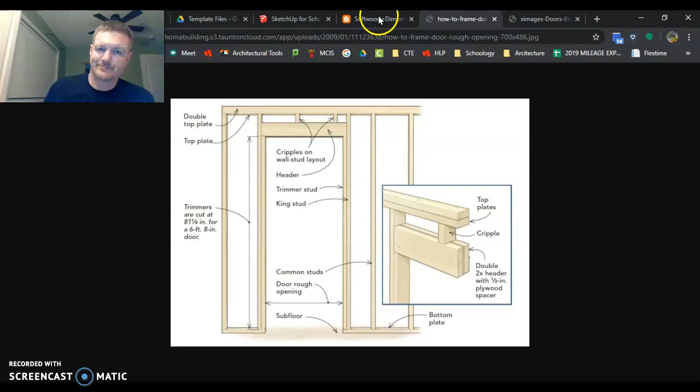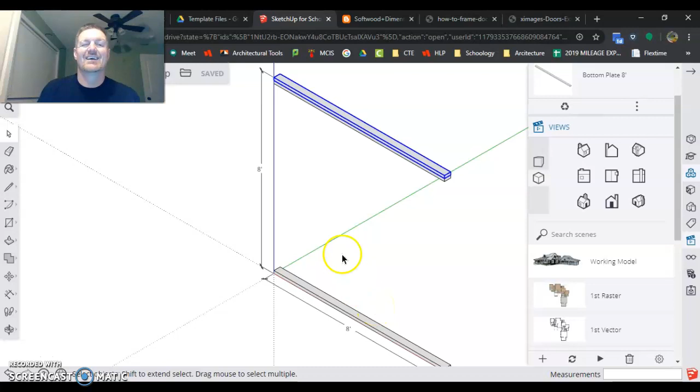So if we go to SketchUp for Schools here, and go to a little bit of a 3D view, you can see that double top plate. Now remember how the first one I had to make a component? These next two I didn't have to make a component because I just made them copies. The following here, we're going to make a stud, and then we're going to have to make a component for that.

So I'm going to click on my rectangle tool, because I need to go 1.5 by 3.5. And if I take a look at that, I already see 3.5 in there. So I'm going to go 3.5, comma, 1.5, and enter.

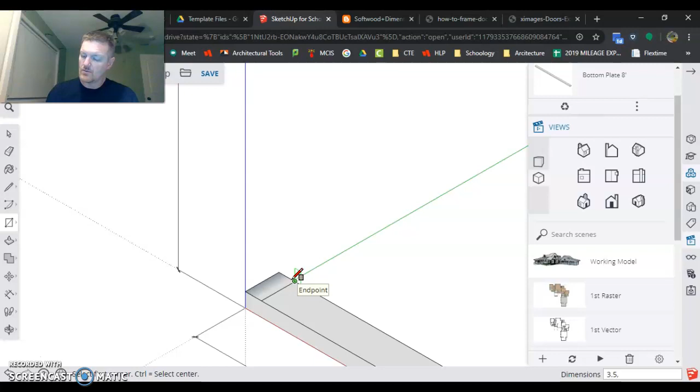Now this is kind of the cool part here. I'm going to use the push-pull tool. Click on this surface. It's kind of doing a little bit of surface fighting, but I can get it to go.

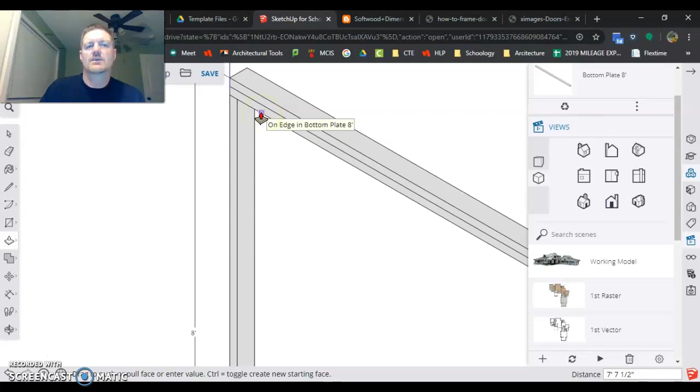And I'm going to just touch it to the bottom of here. And if you actually look down there, touch it at the bottom of the edge plate. It's 7 foot 7.5 inches. So you can type 7 foot 7.5, or you can just do that touch that I just did.

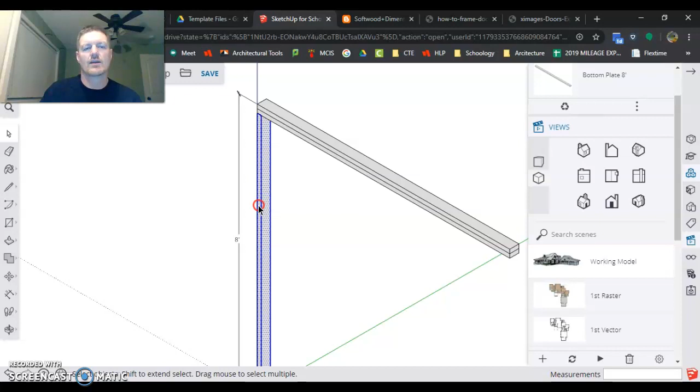Now I notice I can click on all these separate little parts and pieces. I want to triple click again, right click on it, and hit make component and call it stud. You don't have to put Mr. Han in there, I know I am already. So 7 foot 7 and a half inches and hit OK. I know that joke is good every year at this time.

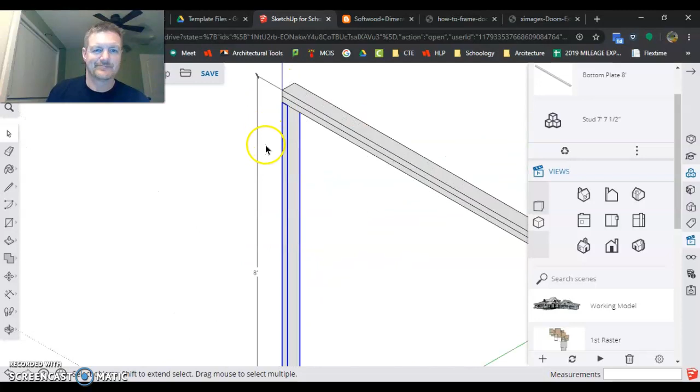And I have my first stud in place. Okay? Now just like before,

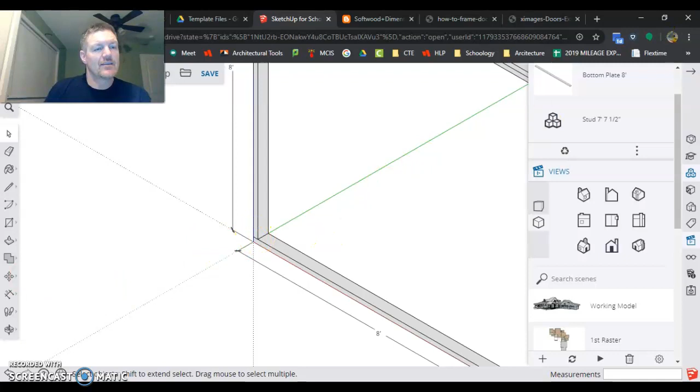we do a little bit of work here to figure this stuff out. Studs are spaced every 16 inches on center, except for that first one. And this is why. We're going to put a sheet of plywood on here.

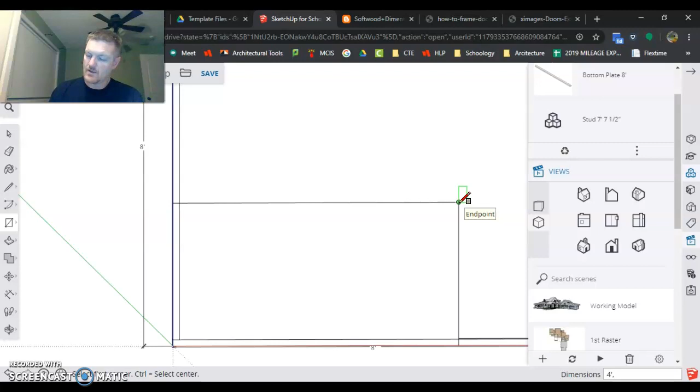And this sheet of plywood is going to be 4 feet by 8 feet. Enter. And that sheet of plywood covers up there. It goes all the way up. So you can kind of see that sheet of plywood sitting on there.

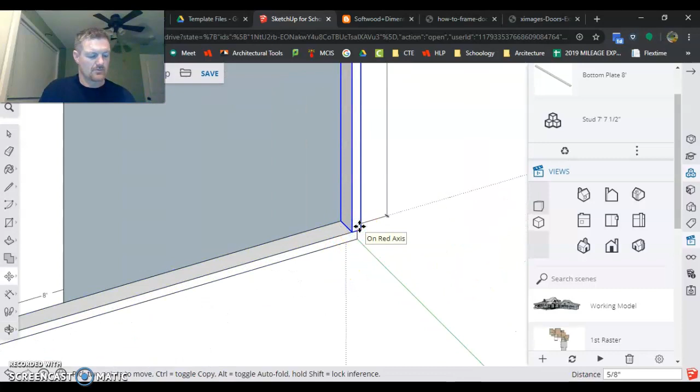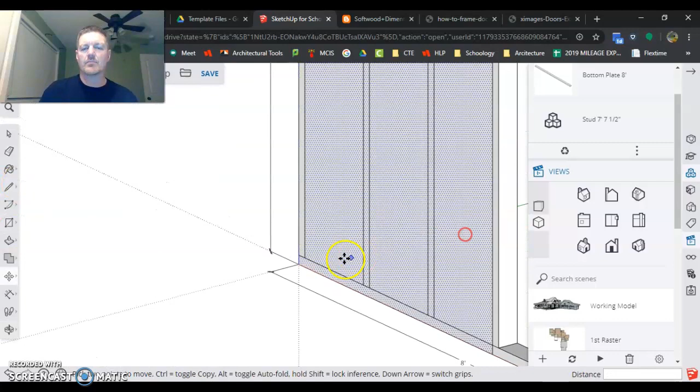If I do 16 inches on center, so I do this move that we did before, and I go Control, move it right down this edge and go 16, because 16 inches on center would make that 16 inches on edge as well. 16, Control, 16. We end up with that sheet of plywood not landing on the center of this stud. So when we go try to nail it on, it doesn't work.

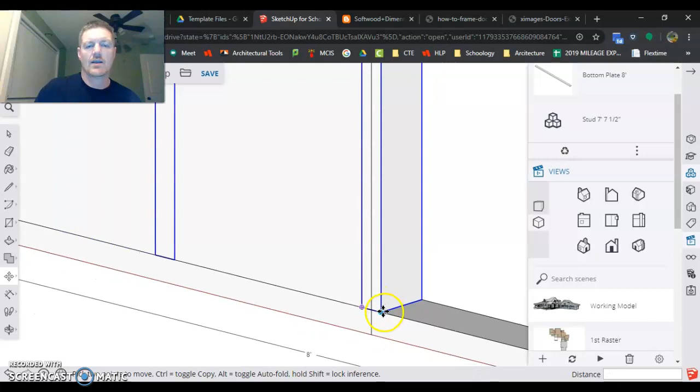So actually, all of these have to kind of get moved over a little bit. So we want this edge of this plywood to land right on the center of the stud. So we move it over 3/4 of an inch. And then that piece of plywood splits that stud perfectly. Then the next one we can keep going and it'll split it all perfectly again. And that all works out then.

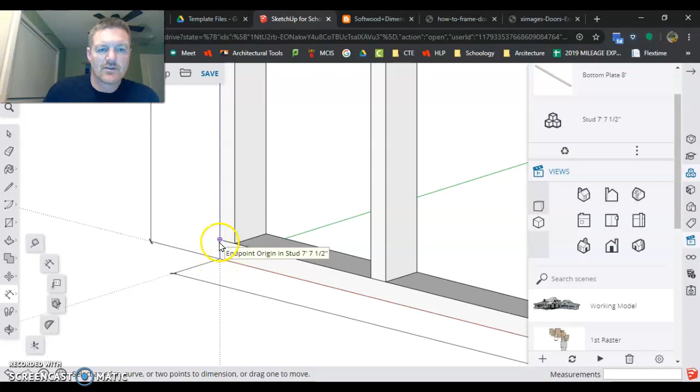So we're going to take that piece of plywood off for a second, and we're going to talk about how far that spacing is on that first one. So that first stud spacing is always 1 foot 3.25 inches, or 15.25. And then you can move your 16s past that.

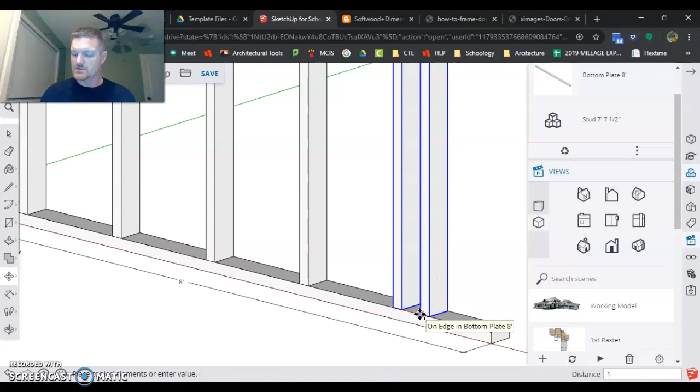So I kind of got mine started already. Control 16, Control 16, Control 16, and this last one lands out in the middle, so we just move it back to the edge. So we started our layout from this far edge here, got our 16s, and we got them all laid out. And we are completed with the studs.